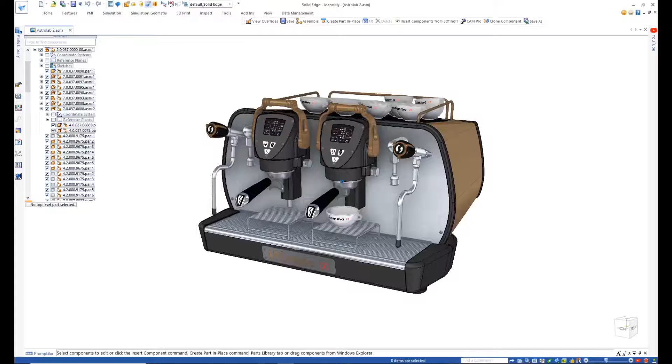Transform your manufacturing and maximize your design data with the powerful automated tools of Solid Edge's fully integrated CAD/CAM solutions. With Solid Edge CAM Pro 2.5 axis now included with every Solid Edge license, let's explore the powerful yet easy-to-use tools with this espresso machine as our example.

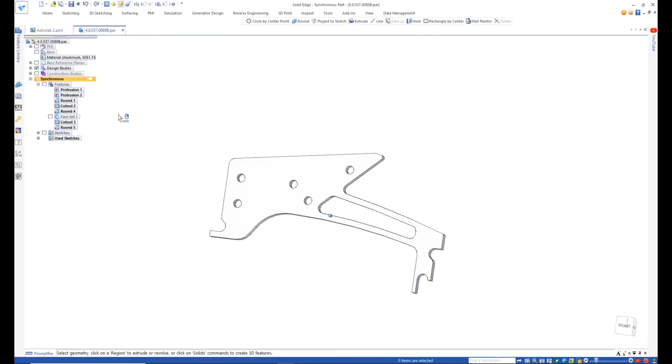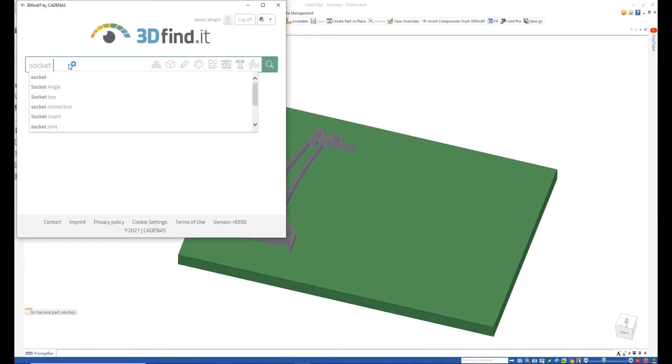We'll leverage Solid Edge CAM Pro to create the manufacturing toolpaths for the machine's rear legs. First, we'll use the Solid Edge assembly tools to create the shape to represent the stock part and also the parts that form the fixture assembly, which include the standoff plate we see here as we add additional fixing holes from the standard database. We'll also make use of the vast supplier catalogs from 3DfindIT to get an appropriate socket head cap screw.

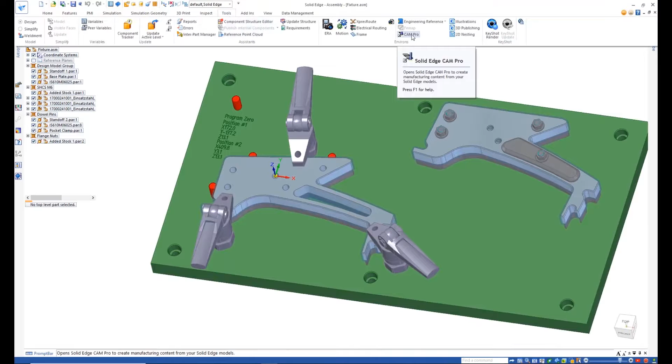You can see here Solid Edge is a great CAD for CAM tool, but also that Solid Edge CAM Pro solutions handle assemblies as well as single parts, which is very important when creating toolpaths and making sure to avoid collisions with the fixture components. We'll machine this design in two setups. Step 1 is to mill the pocket and drill the holes, and Step 2 is to machine the profile.

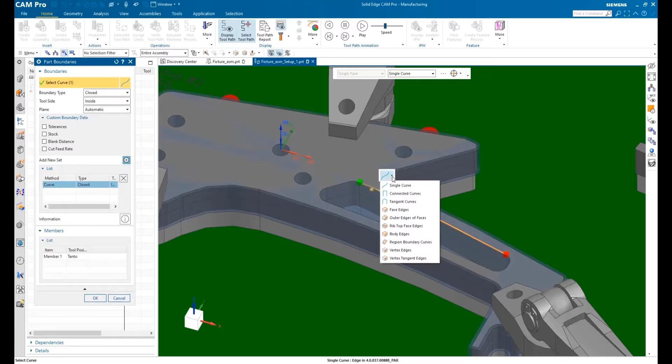One click sends the entire assembly to Solid Edge CAM Pro. Associativity is maintained to the complete assembly, so if there are any last-minute changes, you can quickly accept them and continue the NC programming process. New for Solid Edge CAM Pro is the ability to create adaptive roughing toolpaths for 2.5 axis operations, included at no additional cost. These are faster than traditional toolpaths and extend the life of the cutting tools.

Solid Edge CAM Pro also has great visual tools to build your confidence. Here we're using toolpath animation with material removal to see the cutting effect. Built-in productivity tools like right mouse button context menus allow a user to sail through the NC programming process. Here we'll create a spot drilling operation for the 5 holes in the support.

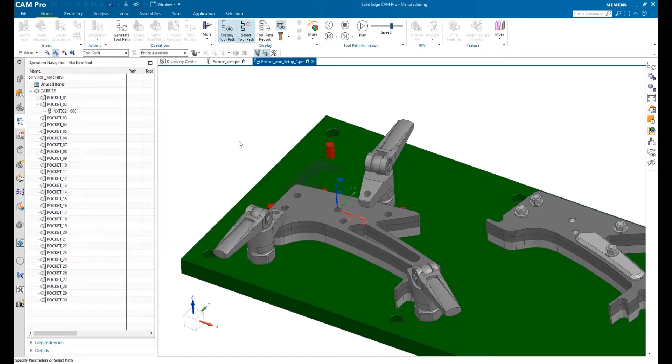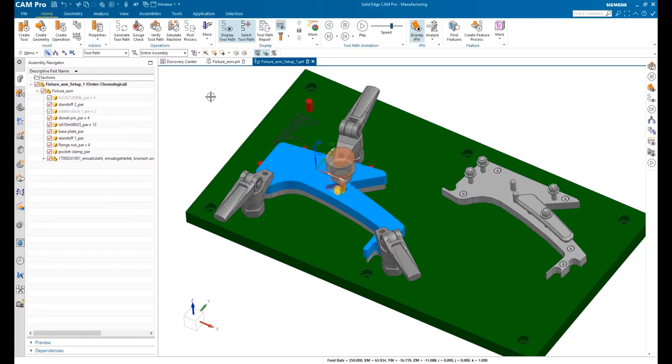Notice the graphical pop-up hints that help us with operation selection. Graphical helps are also available in geometry selection. Each time we select a hole, we get a preview of the machining that will take place. At any point in the process, we can get visual feedback on our decisions. Now that our CNC program is complete, let's run the whole thing through visualization before processing. Pocketing, profiling, and hole making, Solid Edge CAM Pro can do all that and much more.

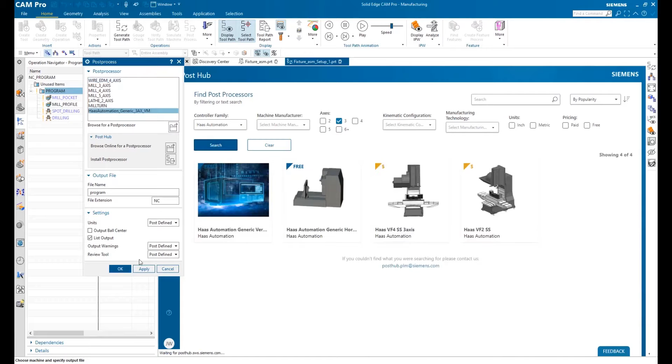No CNC job is finished until it has been post-processed for a specific machine. That's where PostHub, an online database of over 1,200 post-processors, really shines. You can filter using several different criteria to find exactly the one you need. PostHub is also constantly being updated with new posts. Solid Edge CAM Pro 2.5 axis, now included with every Solid Edge license, allows you to transform your manufacturing and maximize your design data.